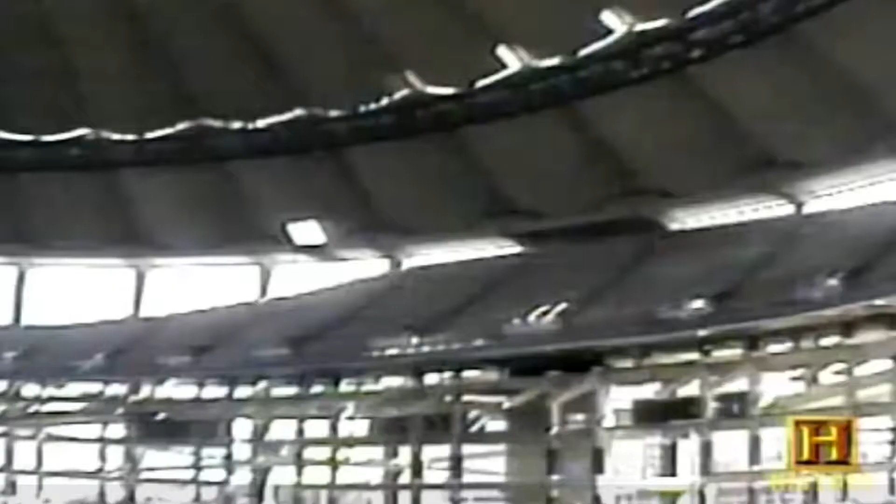The Kingdome became an exclamation point for downtown Seattle. And because of the concrete structure's durability, it was expected to stand the test of time. 8, 7, 6, 5, 4, 3, 2, 1.

But it was not to be. It took just seconds for dynamite to demolish what had taken years to design and build. On a Sunday morning in March 2000, the Kingdome's concrete was blown to bits in a rapid-fire series of detonations. 53,000 cubic yards of concrete imploded in the blink of an eye.

When you watch the Kingdome in Seattle as it's imploding, being demolished in a big explosion, you have to say, why? Why has it only been 30 years that we've used this building? Well, it happens that the needs outgrew the structure.

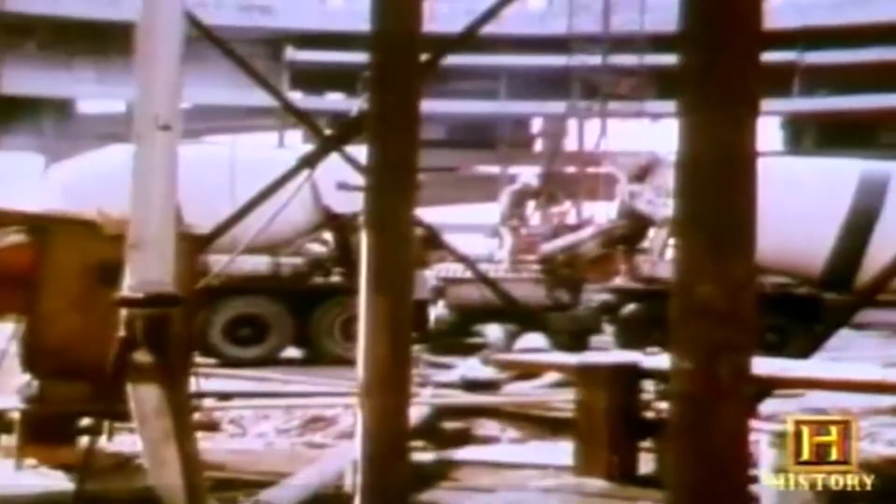Over the years, the Kingdome's concrete had undergone some extensive renovations, but its strength and durability were never questioned. When Seattle's football team was sold in the late 1990s, its new owner was guaranteed a new stadium. That sealed the Kingdome's fate.

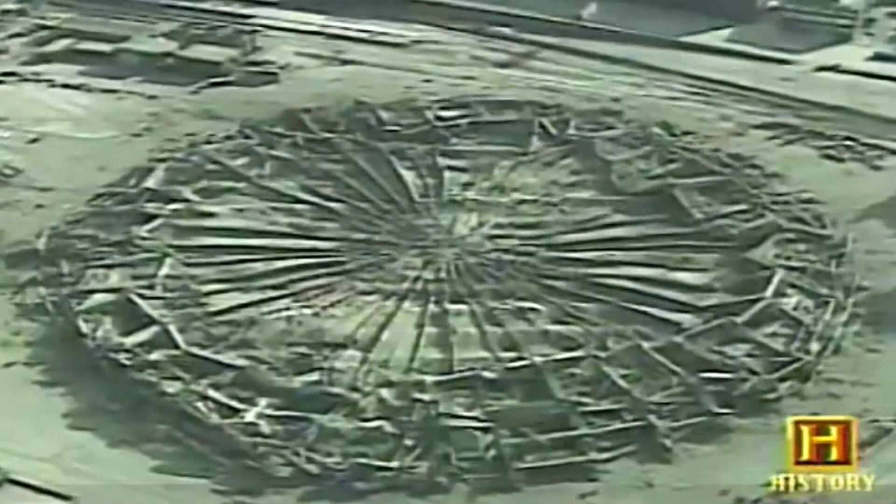It doesn't mean that the concrete materials have gone bad. It's no different than many of the other buildings that have been taken down in order to make way for new structures as we have new needs in the community. This has been happening throughout the ages. And throughout the ages, it is the development and use of concrete that has made it all possible.

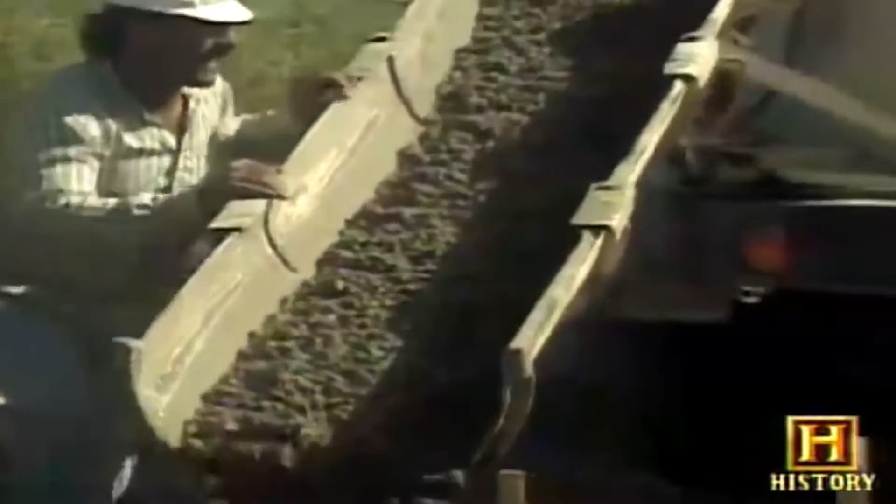Well, concrete is a composite material. It's an artificial stone, and it is made of sand, stone, water, and cement. Each of its ingredients is essential, but it is the chemical composition of cement that makes concrete possible. There's a saying in the concrete industry that cement is to concrete as flour is to cake. If concrete begins with cement, then cement begins at the rock quarry.

Huge rocks and boulders are crushed into a rough gravel. At a cement plant, they're ground into a fine powder, which is mostly limestone. It's then mixed with small amounts of calcium, silicon, aluminum, and iron. This material, known as raw meal, is now ready for the kiln, a huge cylindrical furnace.

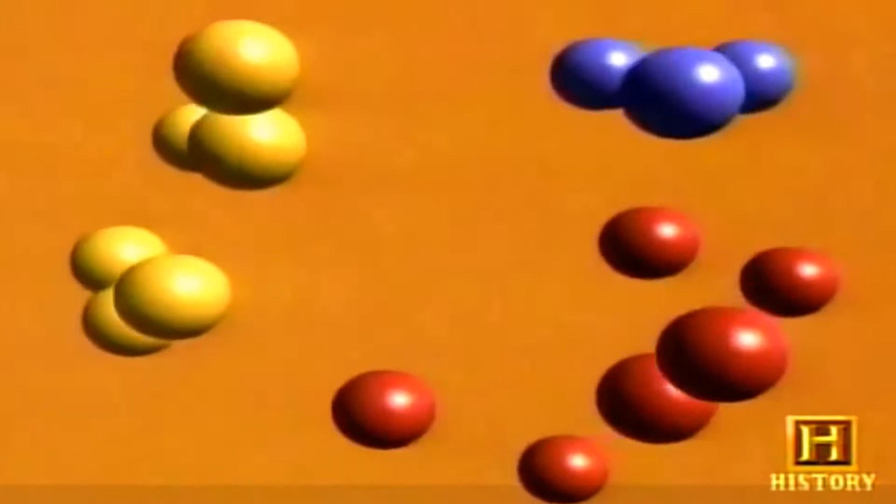A modern kiln is 100 yards long, the length of a football field. It's the world's largest moving piece of equipment, and one of the hottest. The raw meal enters the kiln's upper end. As it turns, the material moves through progressively hotter zones. As it tumbles down the rotating kiln, it is heated to a temperature of 2,700 degrees Fahrenheit and becomes partially molten. Under this intense heat, individual molecules break apart and recombine to form a new marble-sized component called clinker.

Once it is cooled, the clinker is mixed with a small amount of gypsum, then ground into the superfine powder known as Portland cement. It got its name because it resembled stone from the island of Portland, England. Portland cement is the thing that binds everything together. To create concrete, the cement is blended together with water, forming a paste that coats the surface of the final ingredients: sand and hard, coarse stones known as aggregate.

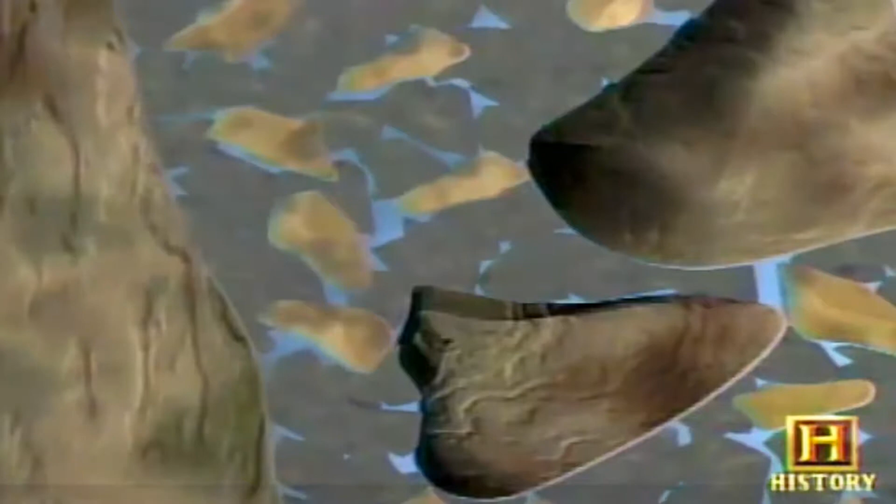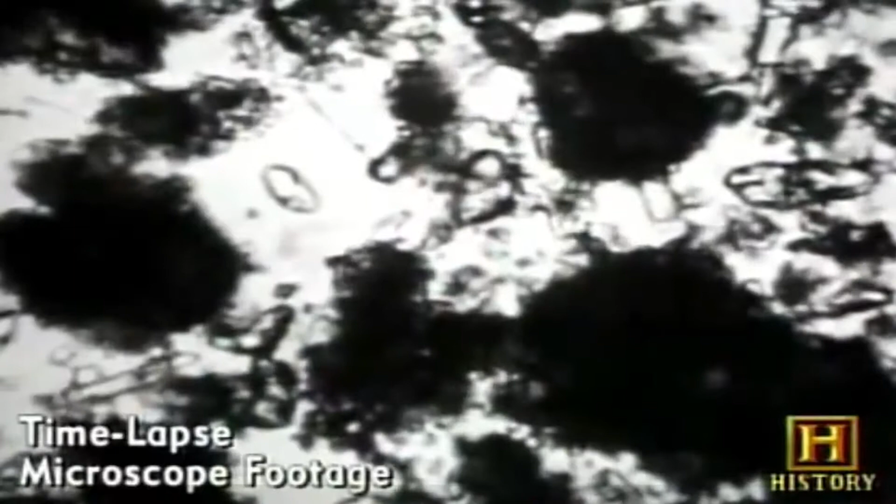When water and cement mix, it begins a process called hydration, which is a chemical process, changing its properties. It goes from a very plastic liquid state to a hardened state. And that process is what combines all of the sand and the gravel and the cement together into this hard mass.

Concrete has evolved into a critical component of modern civilization. You see concrete every day. You walk on concrete sidewalks, you drive down concrete roads, you go to work in a concrete building. Some people go home to live in a concrete house. Concrete is the building block of civilization.

Concrete is as ancient as it is modern. The history of cementing materials together goes back to the time when prehistoric man abandoned his caves to build shelters. He used mud and clay to fill in the gaps between stones, to keep out the wind and the cold. Later, the Assyrians and Babylonians used clay mixed with straw. The straw gave the earthen material packed around it a rough skeletal framework and allowed it to be shaped.

The Egyptians used lime and gypsum, a mineral rich in calcium sulfate, to create a material that would harden even better. The Egyptians may have been using lime and crushed stone to cast certain shapes, small shapes, and use them on their buildings and monuments, but they had not discovered concrete as we know it today, which is a much stronger material.

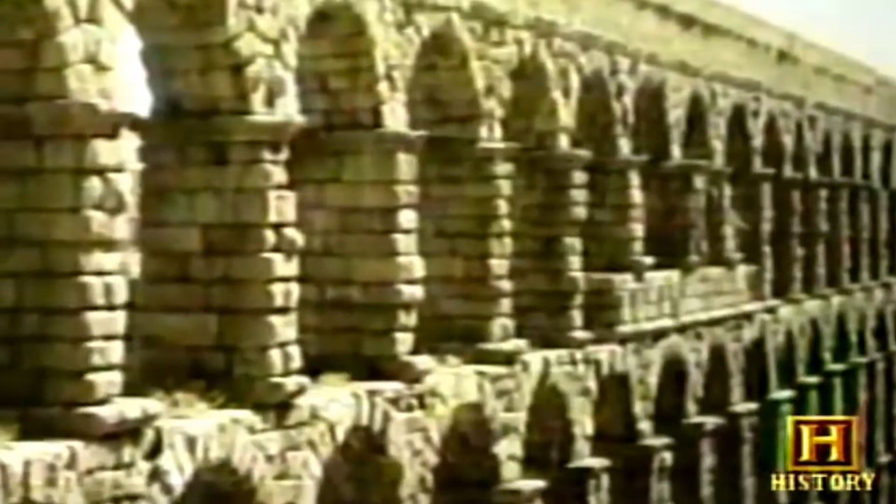The Greeks made further improvements. Then the Romans perfected a cement that produced structures of remarkable durability. We have to go back to the Roman Empire and the ingenuity of the Romans. And the aqueducts, to me, are probably the best and the greatest thing they did. It was only in the ash of the volcanoes that developed the Roman concrete.

That volcanic ash would come to be known as pozzolan. It is a very fine dust, which is good for the concrete because you got a lot of surface area to it. And so when they took the pozzolan and mixed it up like they would put it on the wall, holy moly, all of a sudden they get a real material that'll set hard underwater.

How did they accomplish this? This was a huge open space with a single domed closing on the top. And yet, that was 2,000 years ago. Well, the Roman engineering really developed quite a bit in the highway, in the water transportation, and in the materials area. They learned very specifically how to handle concrete.

While the best examples of Roman architecture still exist today, whatever knowledge their architects had disappeared when their empire faded into the pages of history. The quality control features of making concrete was forgotten. It's as simple as that. They lost the recipe on how to control the quality of their product.

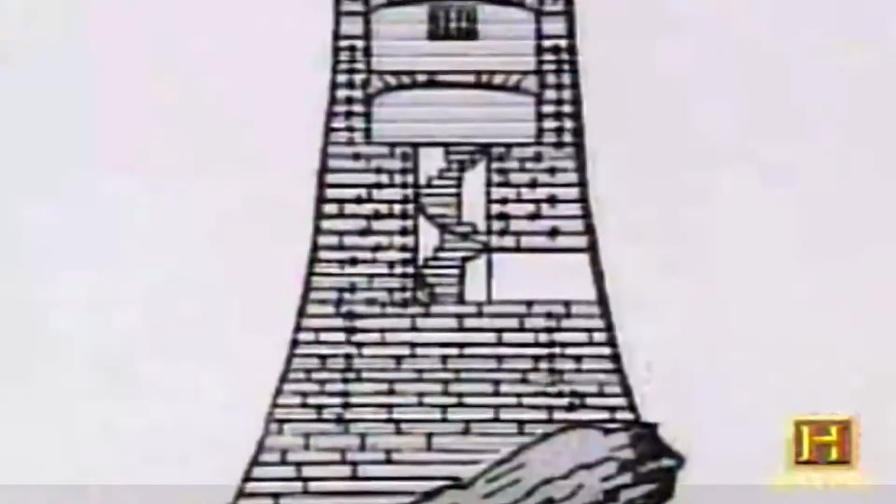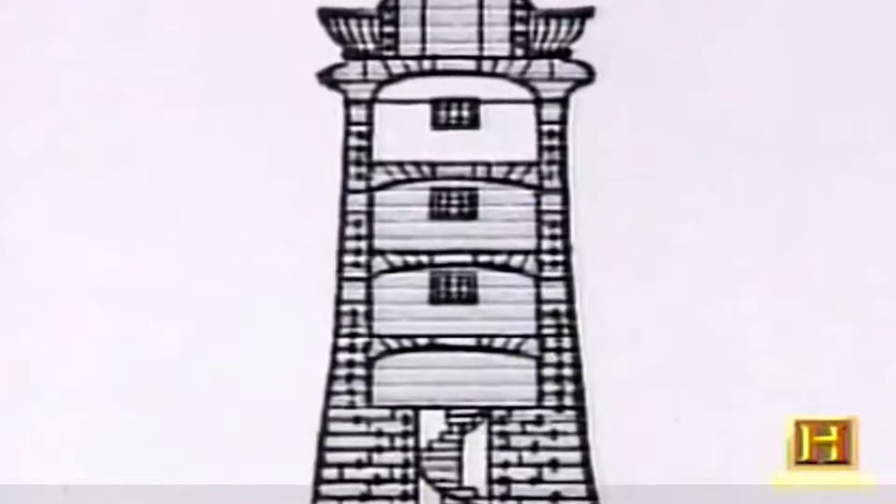He used some of the real clay limestone sources that he cooked or burnt to make a material. It was called hydraulic lime. And he used this for his blocks mortar he needed in the lighthouse. It wasn't a very outstanding material, but it worked underwater. I think it was a definitive moment.

Mortar is the plaster that holds stones together. In order to create a material that binds properly, many scientists experimented with grinding limestone and clay together. But it wasn't until 1824 when another Englishman, Joseph Aspdin, made a major discovery. He burned his mixture of limestone and clay into lumps and then crushed the lumps into a fine powder.

When he mixed it with water and sand, it made a strong mortar that would harden underwater. Aspdin obtained a patent for his product in 1824. He called it Portland cement. His claim to fame is that he patented the process that these other people had been doing for the last 50 years.

Portland cement would come to define the concrete industry. But the next 50 years would lead to a series of new developments that would change the use of concrete and the world forever. At the beginning of the 19th century, the United States was still in its relative infancy as an independent nation. But with its ties to England broken, America had begun a period of rapid expansion that had to rely on its own natural resources: coal, minerals, timber, and water.

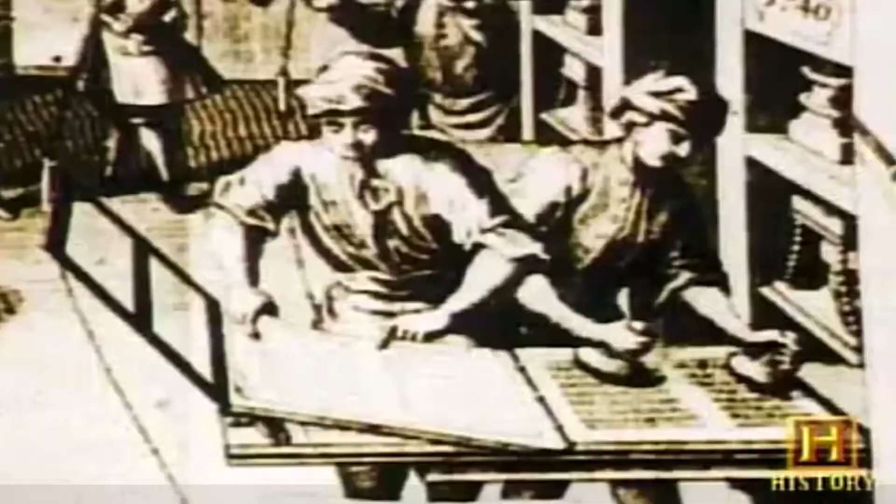In the past 200 years, there's been a very rapid growth, starting in the 1840s, with steel, with glass, with aluminum, with ceramics, with rubbers, and concrete. I think, in fact, that our world civilization reached a point that we needed these materials.

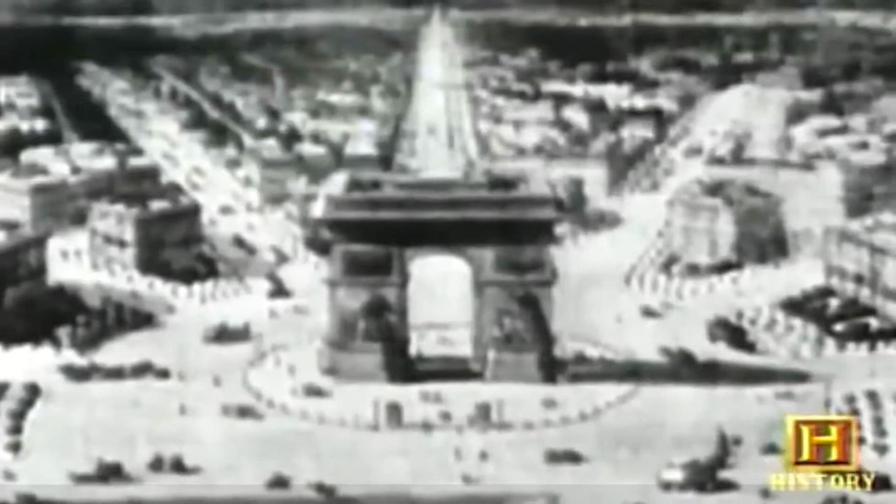By the 1850s, Portland cement had become widely used in Europe, and it was there that a major breakthrough was made that would forever change concrete construction: the first use of iron to strengthen concrete by reinforcing it internally. Reinforced concrete is concrete in combination with some other reinforcing material, usually steel, that when used with concrete actually works to resist both compression and tension in the concrete.

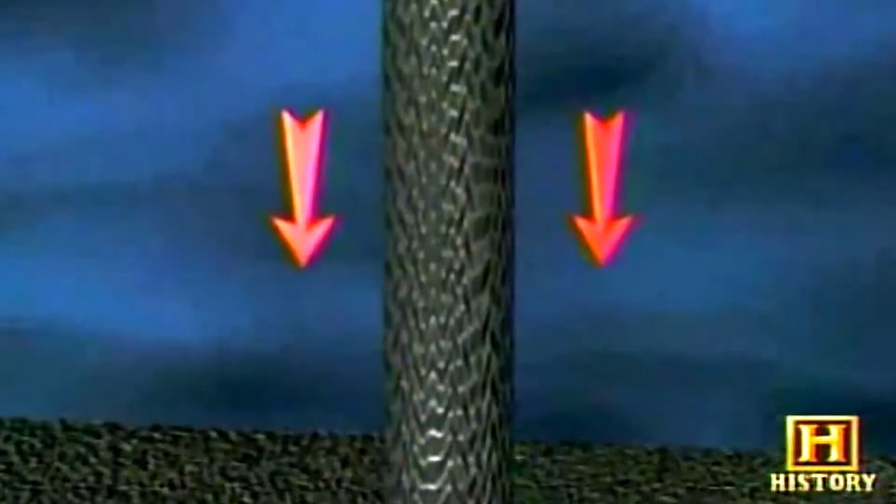Tension is a pulling force that acts in one direction. An example is the force of a cable that is holding a weight. Under tension, a material usually stretches and returns to its original form if the force doesn't exceed the material's limit.

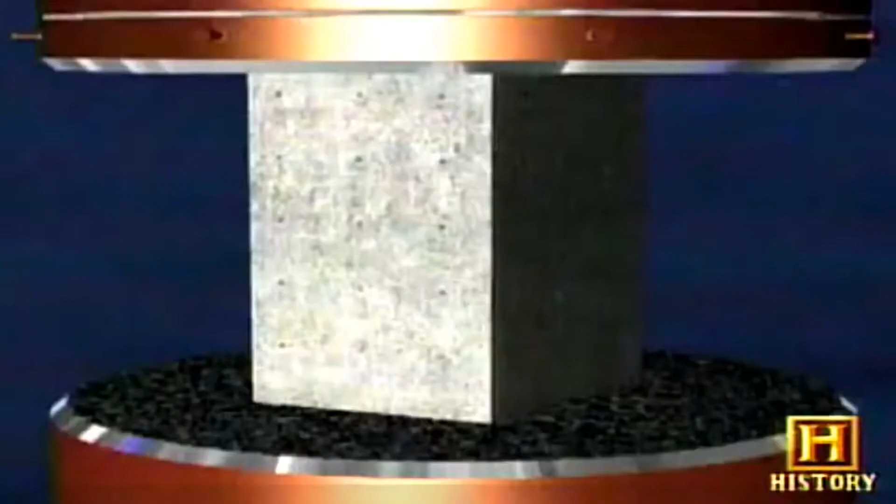Greater forces create greater tension, which can rupture the material. Compression is the decrease in a material's volume that results from the application of pressure. That pressure can come from one or several sources.

Tensile strength is the ability for a material to resist pulling or tension. Pulling is simply pulling material so that you're trying to pull it apart, as opposed to compression, where you're trying to push it together. Concrete, historically, and just by nature, is stronger in compression than it is in tension.

The invention of reinforced concrete is usually attributed to a Frenchman, Joseph Monier, who made garden pots and tubs with concrete reinforced by iron mesh. Monier patented his discovery in 1867. Pretty soon, others in the building trade saw it and began to think of how they could use the material elsewhere. If you could make a pot that strong and that thin and that light, imagine what we could do in the walls of a house or the roof of a cathedral.

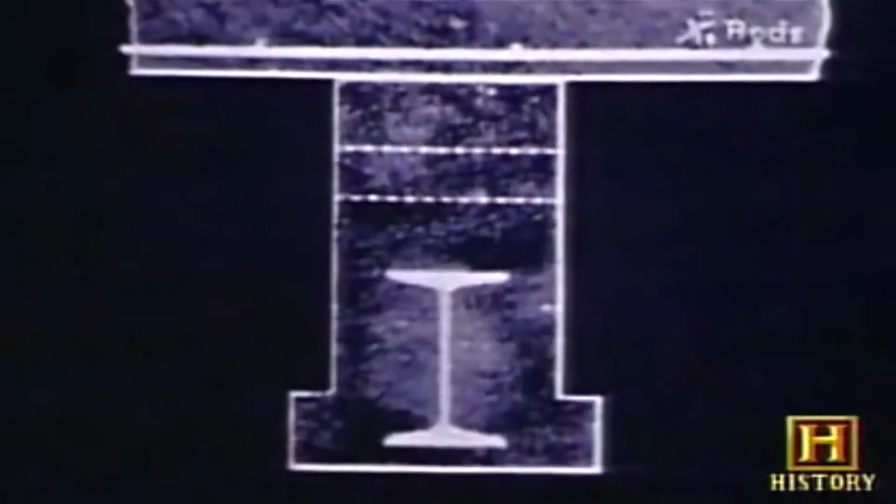The first reinforced concrete structure in the United States was a mansion in New York that made extensive use of concrete beams reinforced by iron joists. When designers began to understand how to design reinforced concrete members, the use of concrete for structures actually expanded significantly.

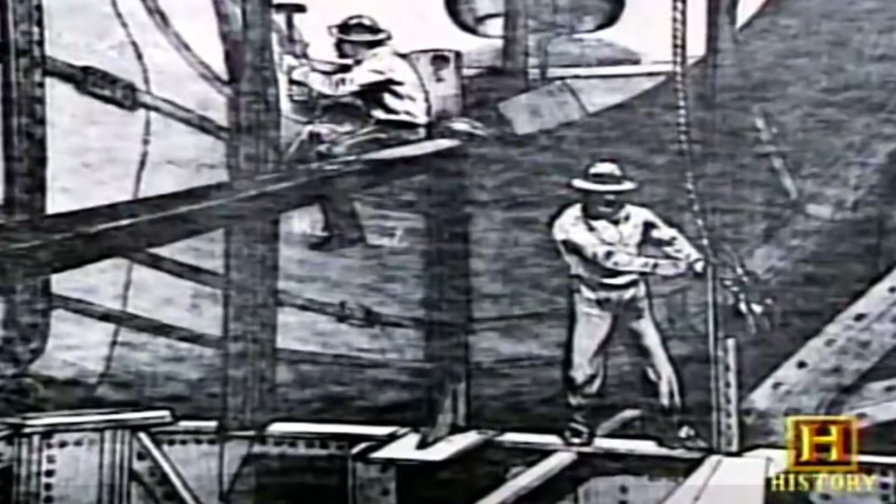Industrial expansion called for a stronger and more uniform material than natural cement. By the 1870s, American engineers had begun to specify the use of European Portland cement for their projects. A Pennsylvania man was convinced he could produce Portland cement in the United States that was just as good as the German and English cement being imported. In 1874, David Saylor founded the Coplay Cement Company in the Lehigh Valley area of Pennsylvania. It would come to be known as the birthplace of the U.S. cement industry.

60-foot tall brick kilns were built to handle the increasing demand. Soon, stationary kilns would be replaced by rotary ones. This way, from the mine, you could keep dumping rocks into this kiln forever. And it would continuously create; you didn't have to cook the thing for 24 hours, empty it out, and then restart a new batch. You're essentially batching the stuff continuously.

It was around this time that Thomas Edison took an active interest in concrete. In 1902, the famous American inventor founded the Edison Portland Cement Works in New Jersey. Edison also had this great idea that he could preform a house. He could make a prefabricated house out of concrete. He thought he could make up a set of very complicated forms that were expensive at the time, and that he could cast a house and then just take all the form work off, go to the next place and make another house.

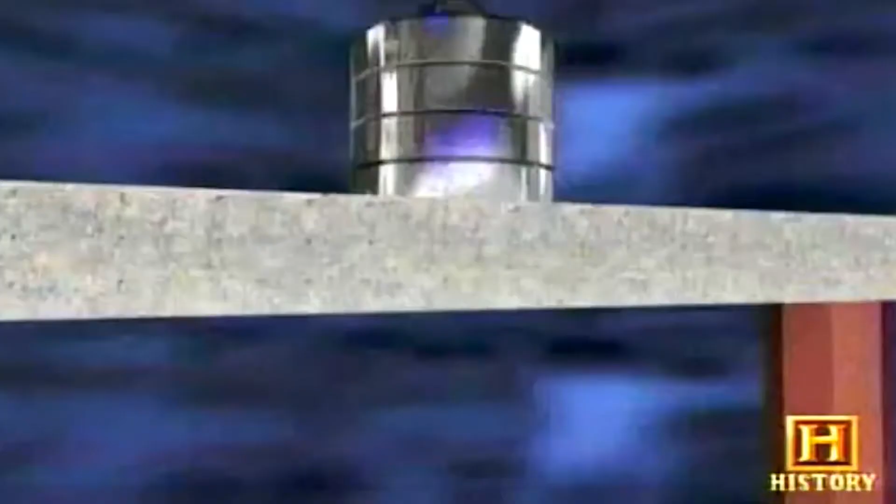In engineering, the term tensile strength refers to an object's resistance to forces that threaten to break it apart. Concrete, though strong in substance, is weak in tensile strength. So if I had a beam and I put a load on the top of the beam, if it did not have reinforcing, the beam would crack very easily and, of course, collapse. However, if we put a steel bar inside the concrete and we put load on top of it, the reinforcing bar goes into tension and can support a much greater load than an unreinforced concrete beam.

While America's skylines were changing, so were its roads. Up until now, roads were made of dirt, gravel, stone, or brick. The first concrete road in the United States was built in Bellefontaine, Ohio, by George Bartholomew in 1891. The American public definitely needed to be sold on the use of concrete as a paving material.

At first, only a small section of Bellefontaine's Main Street was paved with concrete. City officials were skeptical. They thought it would crumble and crack. They required a guarantee that the pavement would last at least 5 years. It did, and then some.

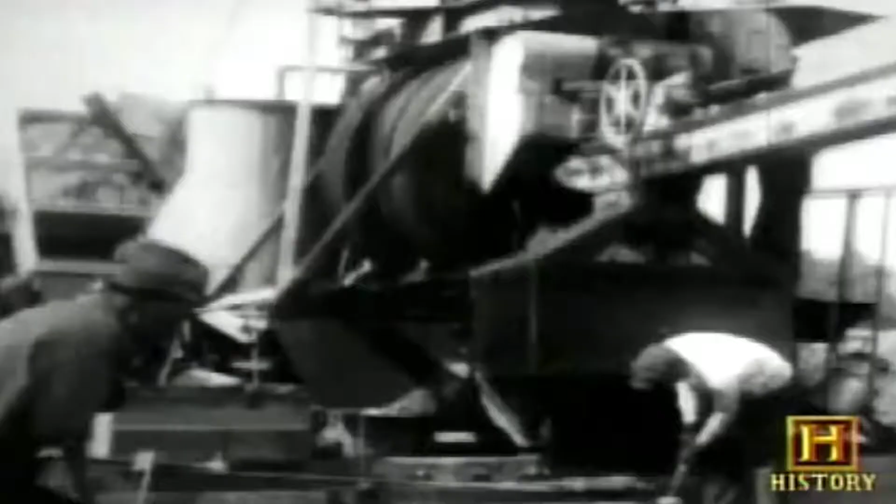There was a huge sales pitch. They paved 1-mile stretches of concrete pavement in different parts of the country in an otherwise unpaved area, and we called them seedling miles. So farmers and other people in their automobiles would drive along an unpaved road and then hit a smooth expanse of concrete pavement, realize how amazingly better the concrete pavement was, and petition their local officials and demand concrete pavement.

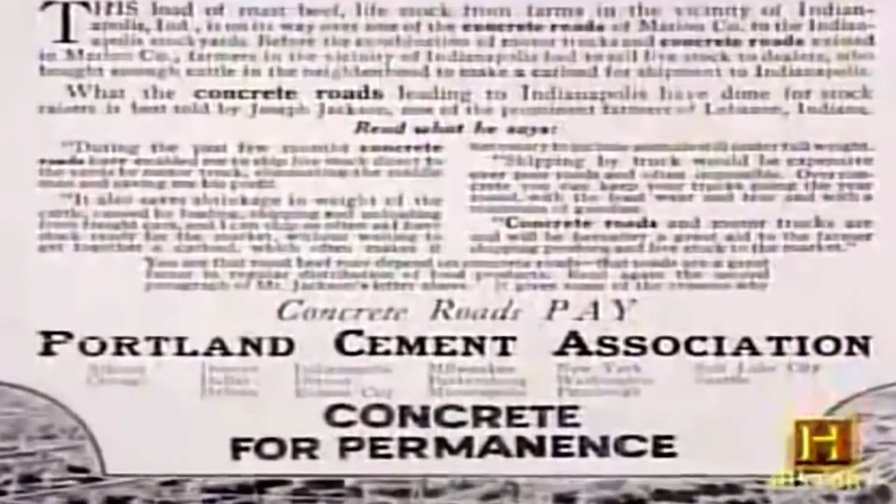The organization ran a series of ads in magazines and newspapers, selling the American public on the benefits of concrete. And one of their biggest slogans was concrete for permanence. One of the most famous ads that we ran was in the Saturday Evening Post, and it was touting the use of concrete roads that children could be off to school on any day. And they said, over the concrete road, so even that children can roller skate upon it, so strong that heavy trucks at high speed cannot break it, so enduring that years of motor traffic cause no appreciable wear, unaffected by moisture, heat, cold, or frost, and maintained at very low annual expense.

Soon, engineers were learning how to better produce this new building tool. In the 1900s in the United States, concrete was made at the site. It was mixed in a small mixer right at the site, and the workmen put in all the components, and many times you got poor qualities of concrete at that time because there wasn't a lot of control. That was about to change.

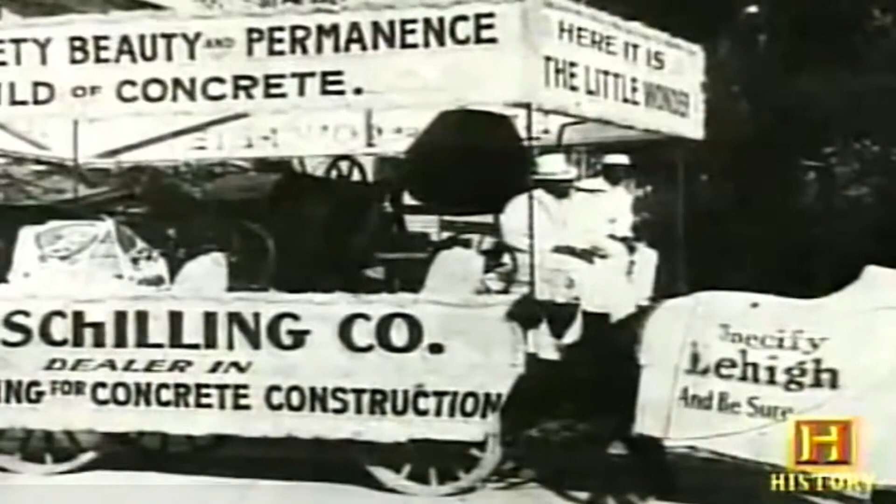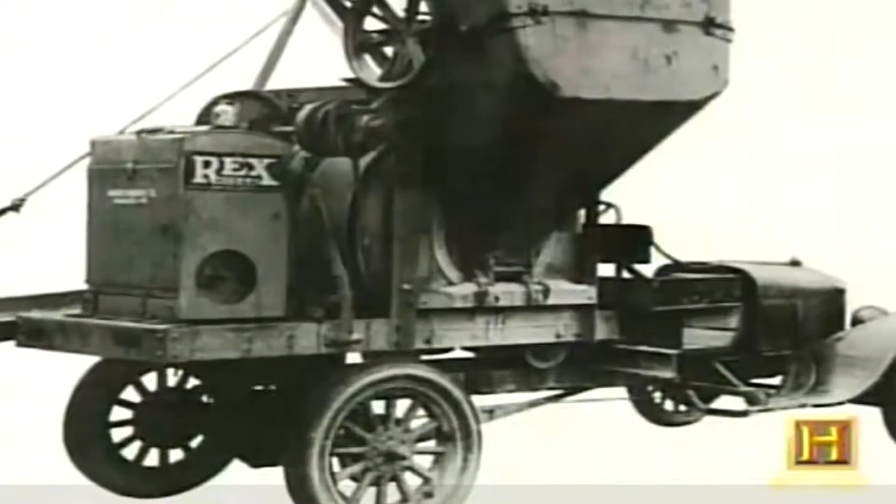It started out in the early 1900s with horse-drawn trucks, mixer trucks. As the horse or mule pulled the mixer, wood paddles would stir the mixture while water from a small tank was added. Because of its size and weight, these mixers were limited in the amount of concrete they could handle. By 1916, steam-powered rotary drum mixers were being used. And in the early 1920s, gasoline-powered paving mixers were being mounted on trucks and driven to job sites.

One of the most important events in the use of concrete is the development of trucks that actually deliver concrete to the site, whereas in the past you really had to mix the materials on site to use it. As fast as Henry Ford was building cars, engineers were building roads and highways that connected cities and towns. Both concrete and asphalt were used. Concrete roads cost more but lasted longer, and asphalt roads cost less, didn't last as long. So it was a question of economics.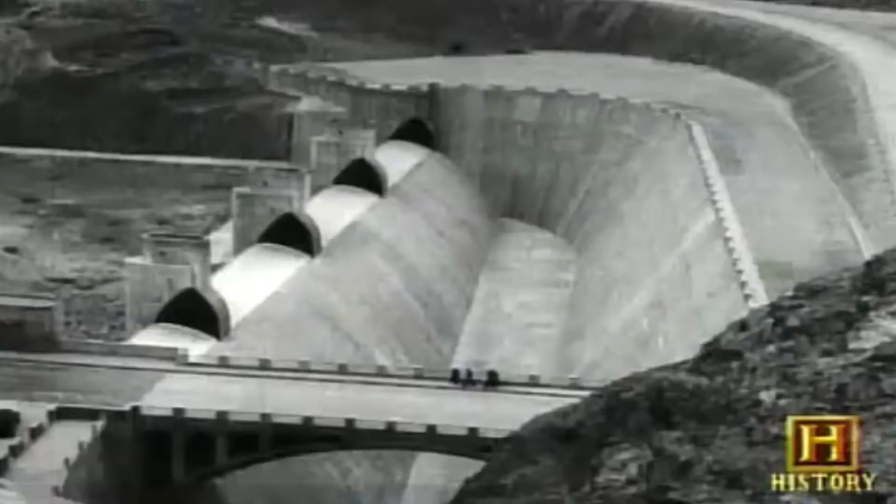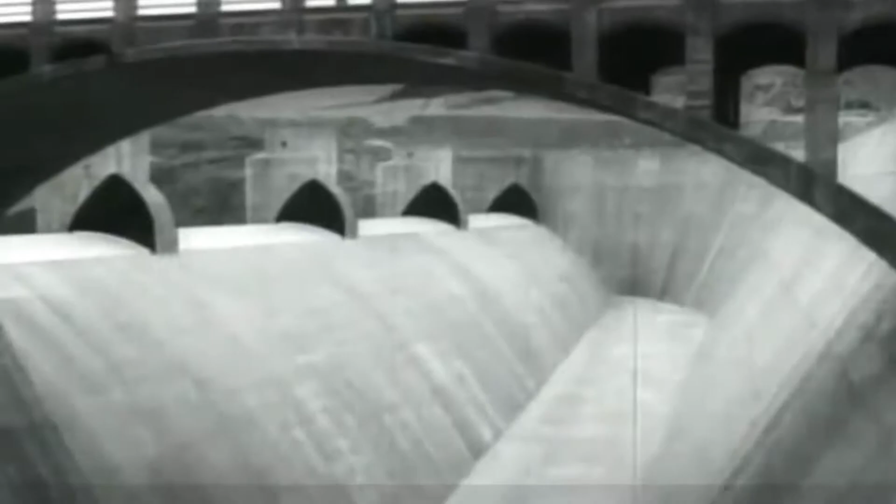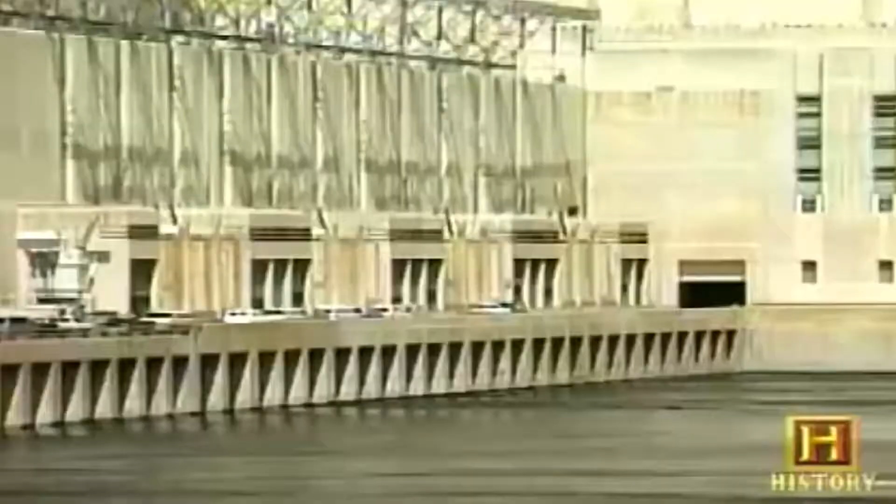While road builders were busy connecting the country, engineers were setting their sights on projects of a much larger scale. Dams. Ever since the beginning of civilization, man has attempted to control water. But to do that, you must control nature itself. Engineers around the world have accomplished that feat with concrete dams. It will take hundreds of millions of tons of concrete and 16 years to build the Three Gorges Dam in China. The gargantuan structure designed to eliminate flooding along the Yangtze River is China's biggest construction project since the Great Wall. Three Gorges will stretch 1.5 miles long, much wider but not nearly as tall as the granddaddy of dams in the United States, Hoover Dam.

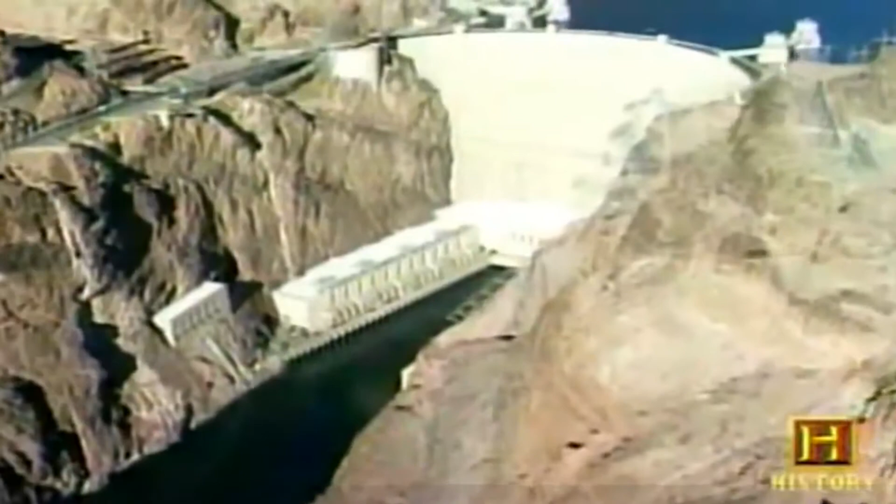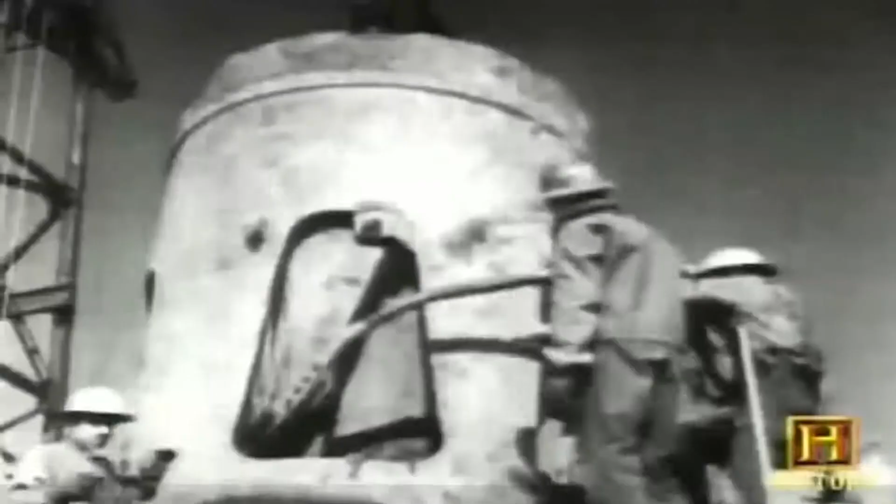I think Hoover Dam does become the benchmark for anybody talking about dams in the U.S. It took more than 3 million cubic yards of concrete to create Hoover Dam. Built on the Colorado River near Las Vegas, Nevada, Hoover Dam weighs 6.5 million tons. It stands as tall as a 70-story building. It was poured in thousands of separate pieces, then linked together, literally forming a concrete curtain. Construction crews not only had to deal with soaring desert temperatures, they had to contend with the massive amounts of heat generated from the concrete as it cured.

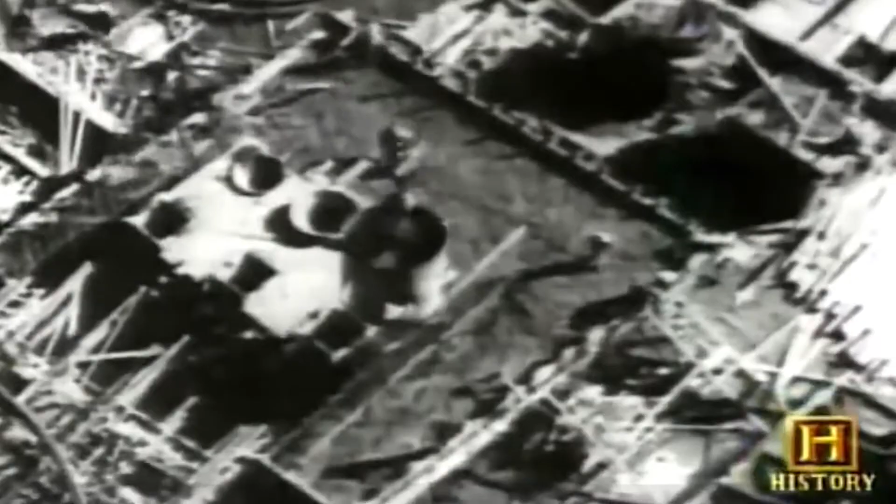All concrete, as soon as the cement, the binder, mixes with water, gives off heat. In a dam construction, however, it becomes a very serious concern because of the temperature buildup within the structure. On Hoover Dam, miles and miles of pipes were built into the dam and carried cold water through the dam while the concrete was curing. If the dam had not had those pipes for cooling, it would have taken 125 years for the temperature of the concrete to reach ambient conditions. Vibrators were inserted into the freshly poured concrete, literally jiggling it and removing air pockets.

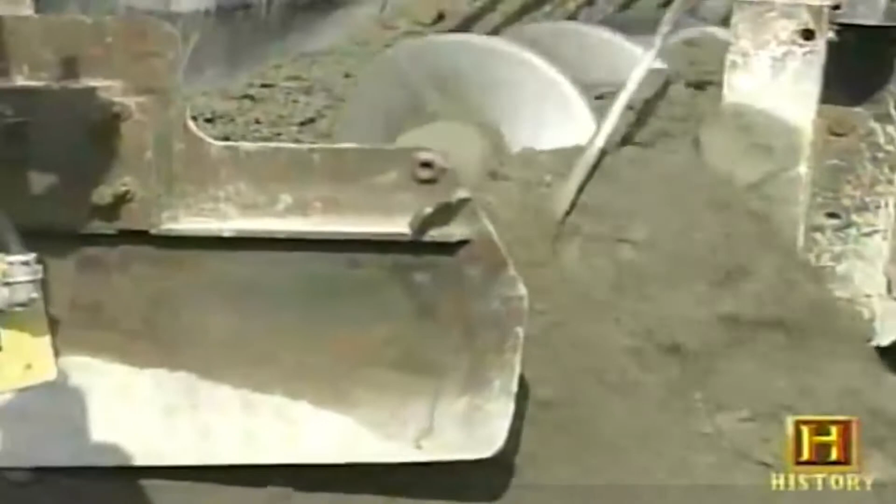Modern dam designers still vibrate freshly poured concrete, but more and more are turning to a newer and drier form of concrete. Roller compacted concrete is a very stiff mix of aggregates and sand and cement. It's only under the high pressure, the heavy load of the roller, that actually compacts it into something tight enough for you to actually use.

We dump it out of a dump truck and we run over it with a steamroller, essentially. And we keep doing that in layers until we're 200 feet up in the air. Basically, as fast as you can make concrete is how fast you can make a dam.

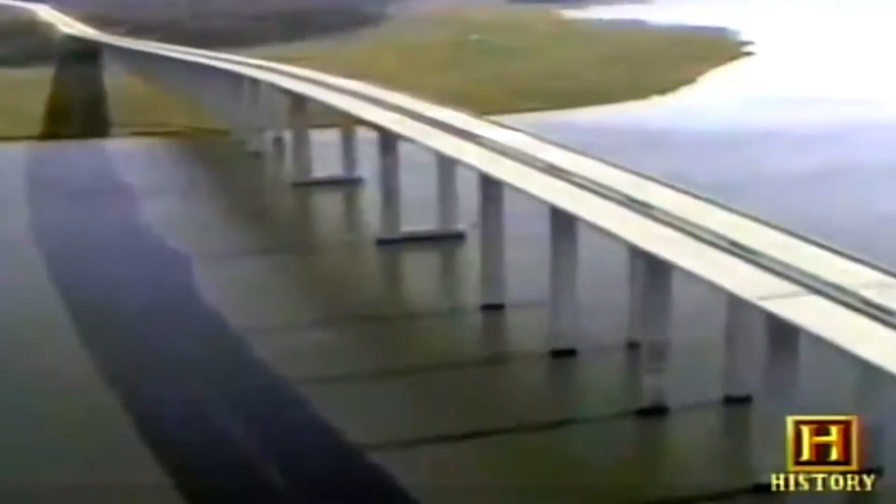If concrete dams are designed to hold back water, concrete bridges are built to traverse over it. The challenges are the same for any bridge designer from the beginning of time. The loads it has to carry. The first concrete bridge reinforced with steel in the United States was built in Rock Rapids, Iowa, about 1894.

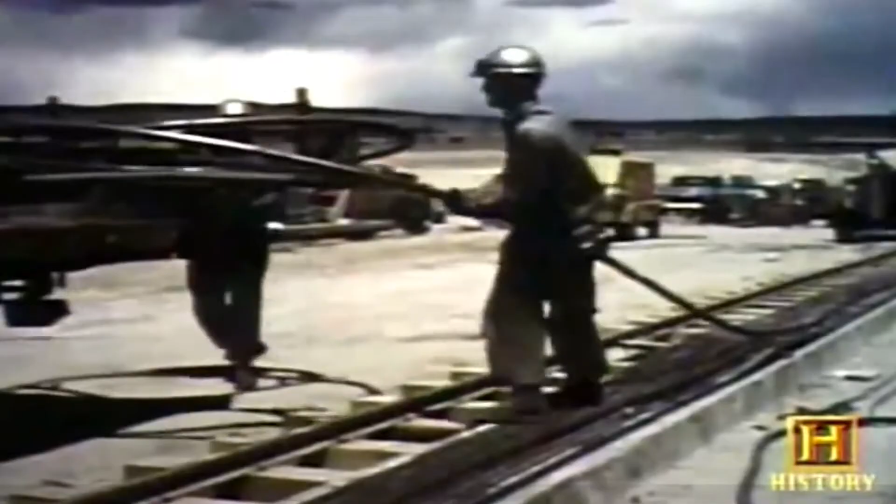As concrete bridge making evolved, it embraced the principles of pre-stressing, using concrete structural members along with reinforced steel strands to increase its inherent lack of tensile strength. The cables are stretched tight, like a rubber band, inside sections of concrete as it is being poured. The hardened concrete now includes the extra strength of steel.

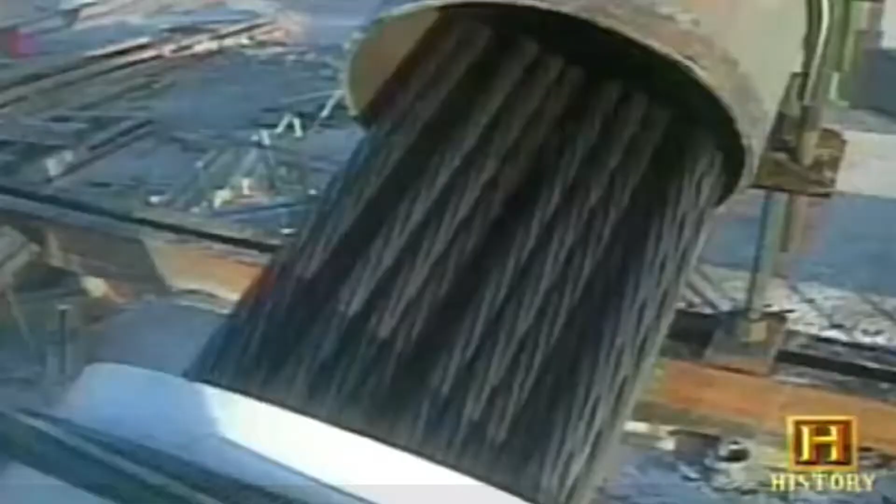Pre-stressing is something that complements concrete. Concrete is a compressible material. It'll hold tremendous loads compressing it. But if you try to bend it, it'll crack. So what we do, we add pre-stressed strands, and these strands, if you can envision a block of concrete, you have a pre-stressed strand that goes all the way through the block.

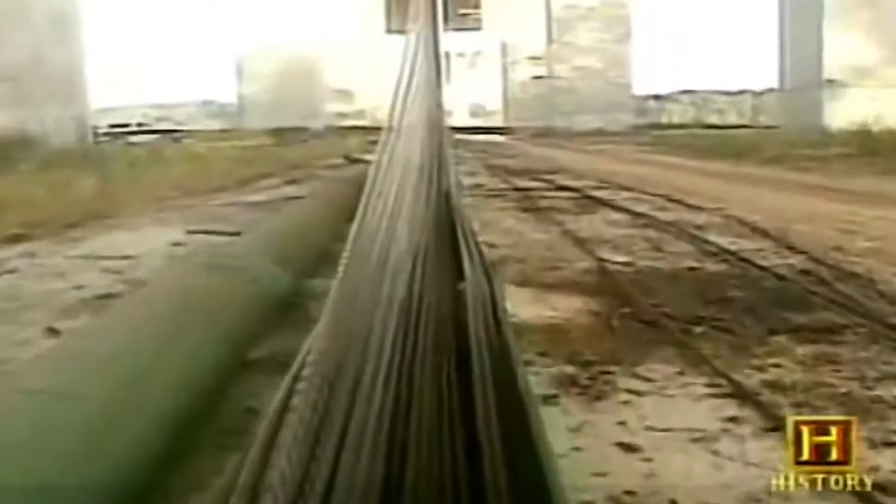You pull on that strand and it pushes the concrete together, and it takes the tension at the bottom of a span for the concrete, and then the top of the span becomes in compression. So now you have an element of concrete and steel that is extremely durable. The first major bridge to use this technique was the Walnut Lane Memorial Bridge, built in 1950 in Philadelphia, Pennsylvania.

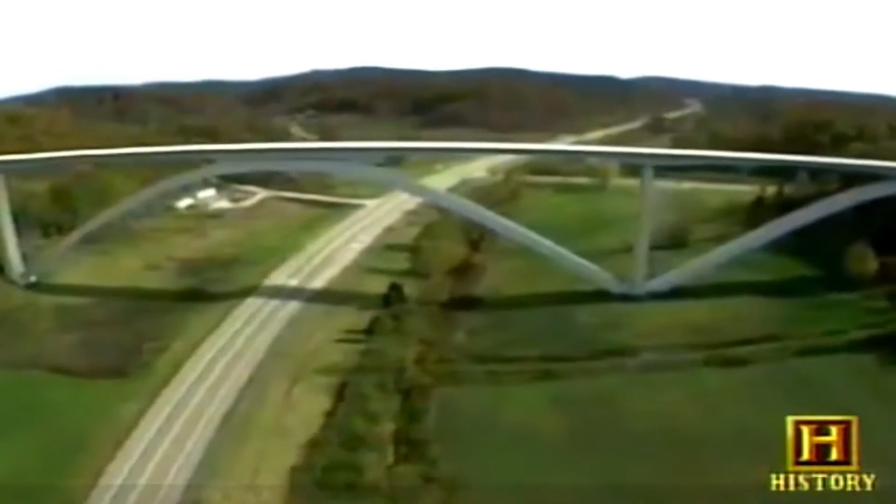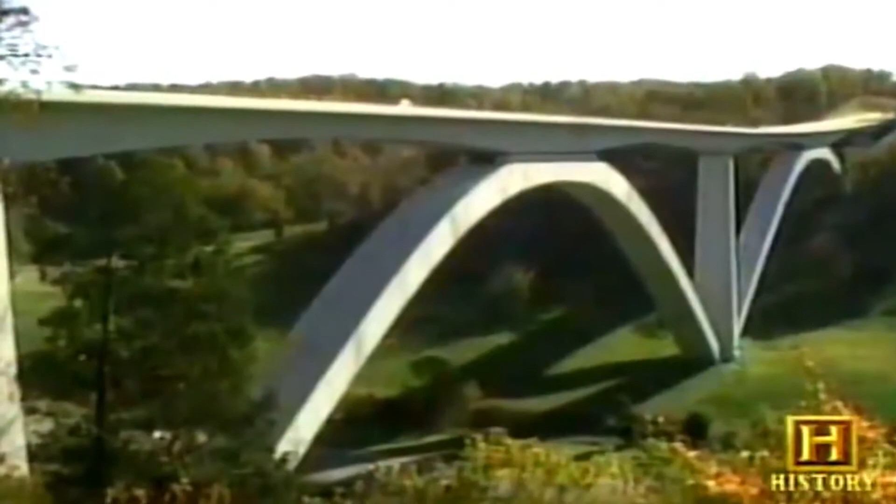Gene Figg continues the tradition of American concrete bridge making from his Florida office. Figg Engineering has designed some of the world's most sophisticated concrete bridges. We feel that America deserves better and beautiful bridges. Figg's company designed the Natchez Trace Parkway Arch Bridge. It was built in 1994 near Nashville, Tennessee. It's America's first and longest precast segmental concrete arch bridge. In theory, building a segmental bridge is like stringing beads together on a necklace.

The Natchez Trace Arches was a chance to cross a valley, and at the same time, it was a chance to really utilize different shapes of concrete. And it all comes together with seamless appearance because it all matches, which is one of the key things in a bridge. If you can get a seamless connection, then the bridge, you don't know why it looks good, but it really looks good.

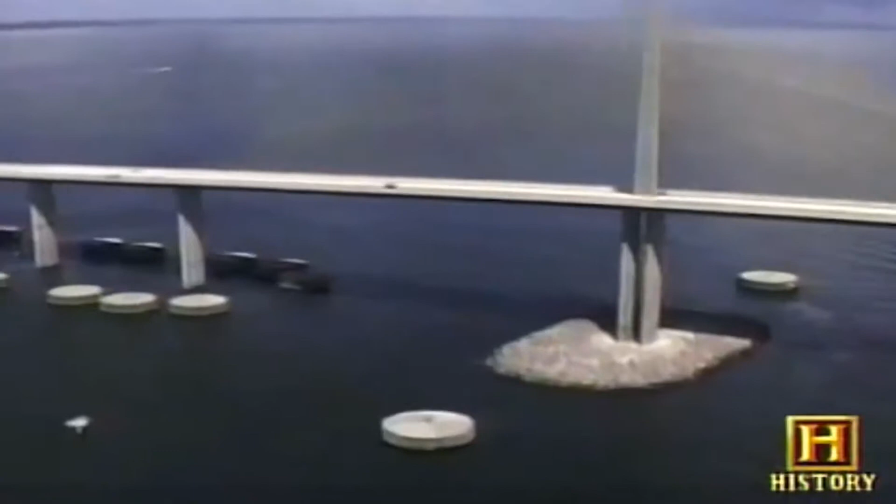The Sunshine Skyway Bridge in Tampa, St. Petersburg, Florida, is among the company's many other signature concrete bridges. This is what is known as a cable-stayed bridge. It's created a thin silhouette of concrete that seems to float in midair. If we're going over water, we try to have the bridge have some shape to it that's not just a straight bridge. It has some movement to it. The Sunshine Skyway Bridge is distinctive because it has an element of a sailboat going across the whole bay.

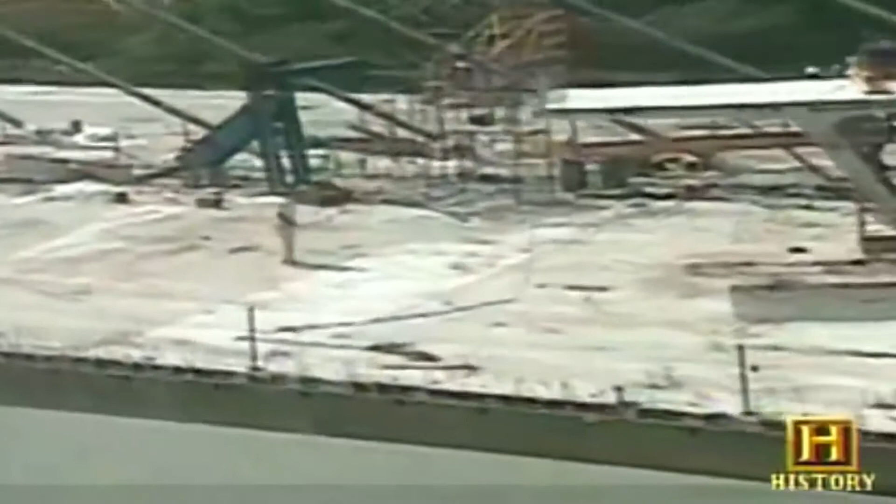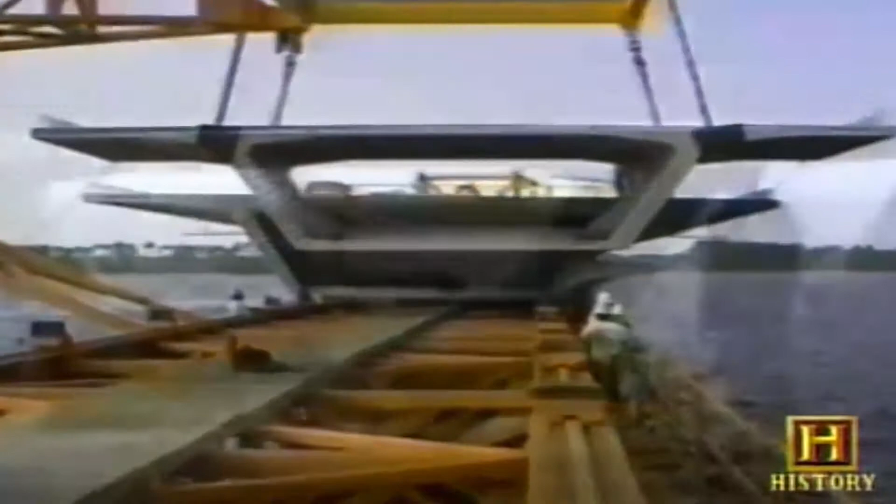But when you build a concrete structure like this, you expose it to the elements, wind, rain, and salt water of any kind. The environmental enemy of concrete would be salts. The cracks are the problem. Cracks in the concrete cause the seepage of this salt material to go down and corrode the steel. With the performance you can get today from the concrete and the pre-stressing, you'll end up with a bridge that's really just so durable that the life is more than 100 years.

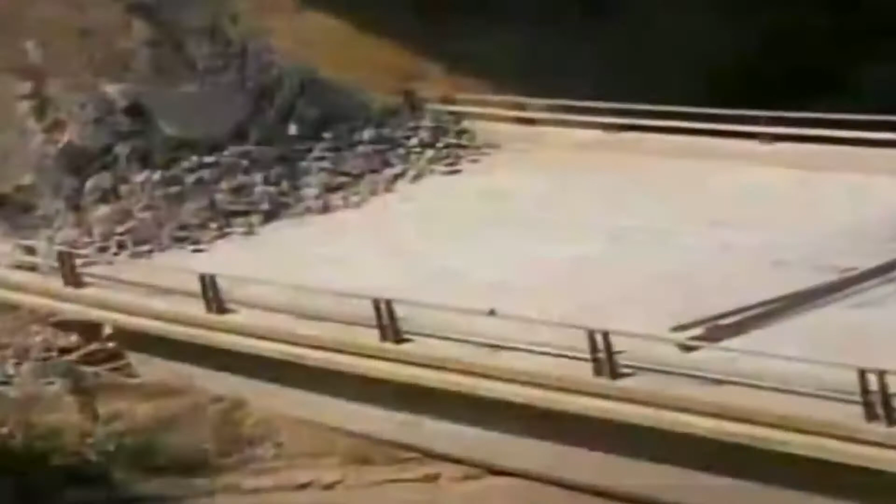Next, concrete may be strong, but nothing is immune from the mighty power of Mother Nature. Concrete has become an indispensable building material of modern times. It is formed into giant slabs for airport runways, molded into miles of superhighways, shaped into precast sections of bridges, and poured into the foundations of eye-catching skyscrapers of enormous weight and girth.

The process of taking a fluid material, pouring it into a form, and having it set up to something that can support a 100-story building is amazing and is one of the prime properties of concrete. Concrete's an exciting material. You know, people think of concrete as the gray stuff, the sidewalks we skin our knees on, that material we sneak our handprints into.

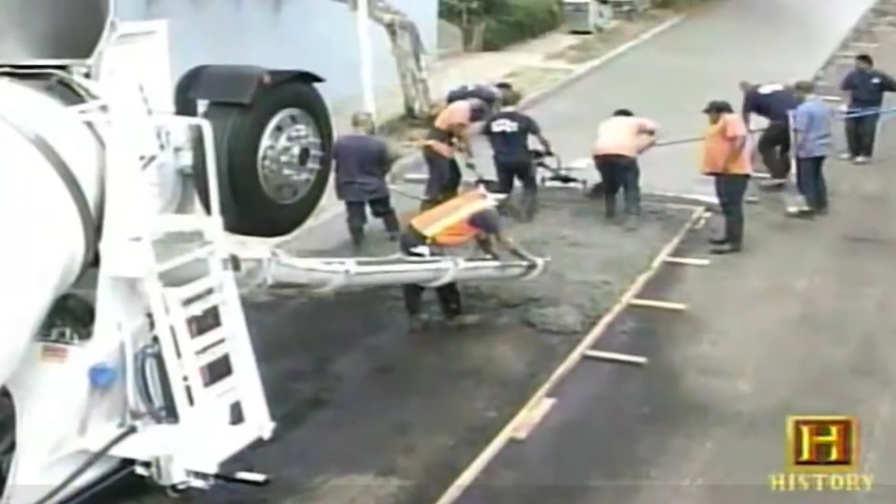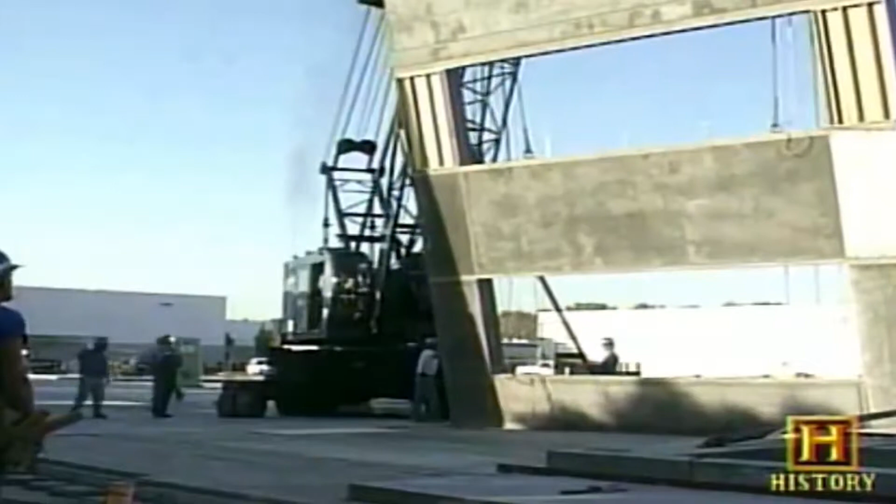But concrete's pluses are also its minuses. By its very nature, concrete is an extremely heavy material and not flexible. All concrete cracks, it's the nature of concrete to crack. Concrete buildings, of course, are subjected to a lot of different environmental conditions. Some of these environmental conditions are forces, such as earthquake forces or wind forces, tornadoes and hurricanes.

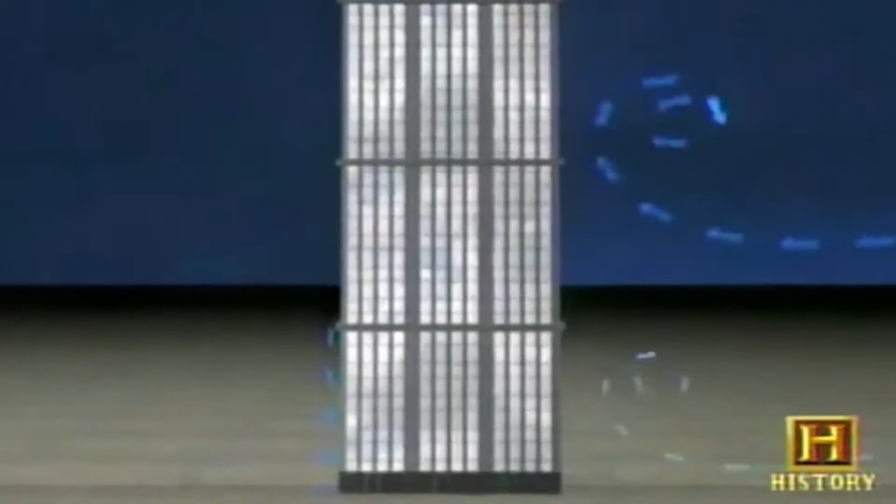The taller the building, the greater the wind forces that push it back and forth. But the greatest and most unpredictable threat to a concrete structure comes from the ground up. San Francisco, California was practically destroyed by a powerful earthquake in 1906.

The entire Bay Area sustained major damage from another tremor, the Loma Prieta quake in 1989. In Southern California, the 1994 Northridge earthquake destroyed freeway overpasses and collapsed buildings. Even the mighty strength of reinforced concrete must yield when the Earth's tectonic plates collide.

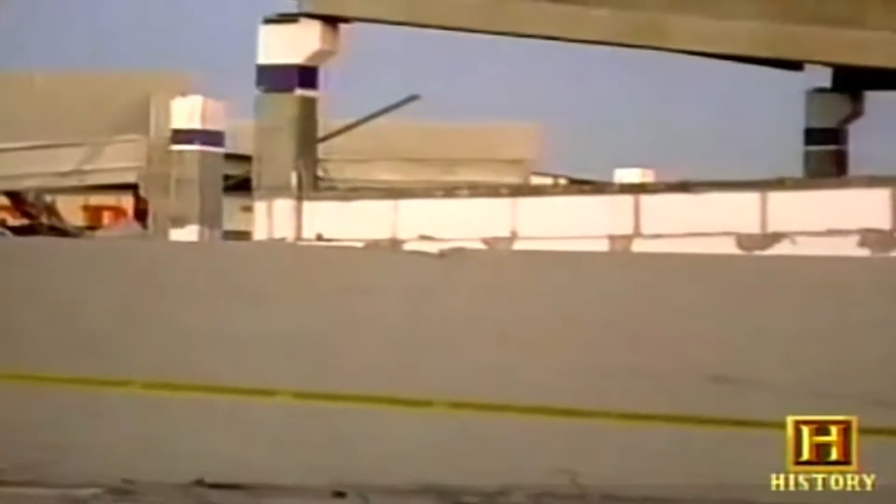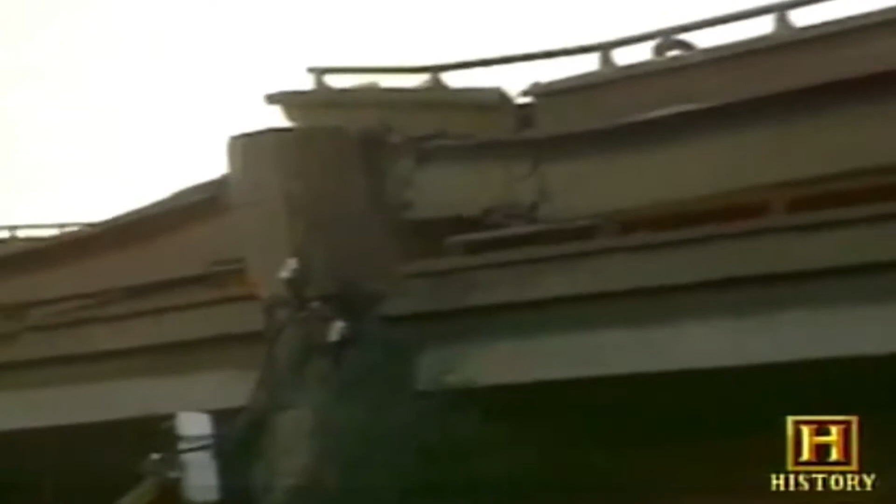Earthquakes are a real nasty thing. Here's the building sitting in the air, and here's the building, here's the ground. Well, the building doesn't know that it's supposed to move with the ground, so it's sitting, and there's a shear condition that moves across the picture and it cracks everything, cracks all the concrete and bends the steel and cracks the steel. So what you have to do is design these structures to take an estimated shear so that it won't bend. It moves, but it doesn't bend.

Scientists have been studying the effects of earthquakes for many years. Quakes are often simulated in laboratory stress tests. One thing about earthquakes is that we still don't have a great understanding of how they work. And so certainly after every earthquake, we gain some knowledge that we can then incorporate into our new building codes and our new design techniques.

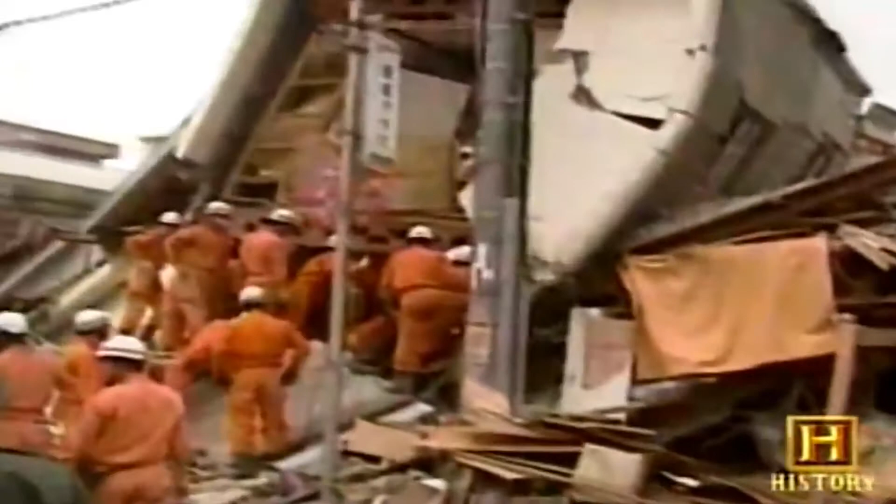Kobe, Japan, 1995. The city is decimated by a powerful earthquake. Hundreds of thousands of buildings are destroyed. It was a brutal lesson. We're learning. A lot of things that had problems, either in California or in Japan, were buildings or bridges that were designed before we knew these things that we know today.

Another natural enemy of concrete is wind, especially the violent forces of hurricanes and tornadoes. This is Hurricane Carla in all its strength. After several days of waiting in the Gulf of Mexico, late today it moved inland.

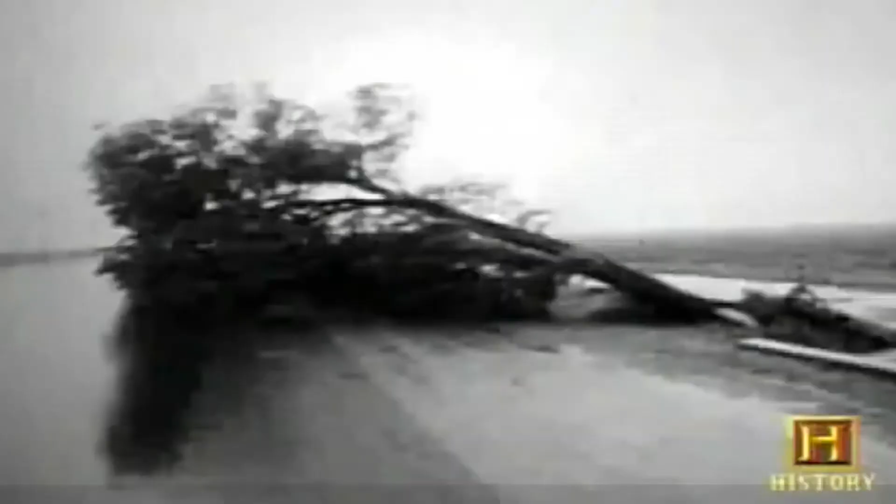Hurricane Carla ripped through the Texas Gulf Coast in 1961. Its two-day-long rampage left a wide path of destruction in its wake. Winds of more than 100 miles an hour sent deadly projectiles flying through the air like missiles. Concrete structures were better able to withstand the storm than other traditional wood-framed buildings. 3, 2, 1. Lab tests have shown that walls made of concrete can withstand wind forces greater than any hurricane.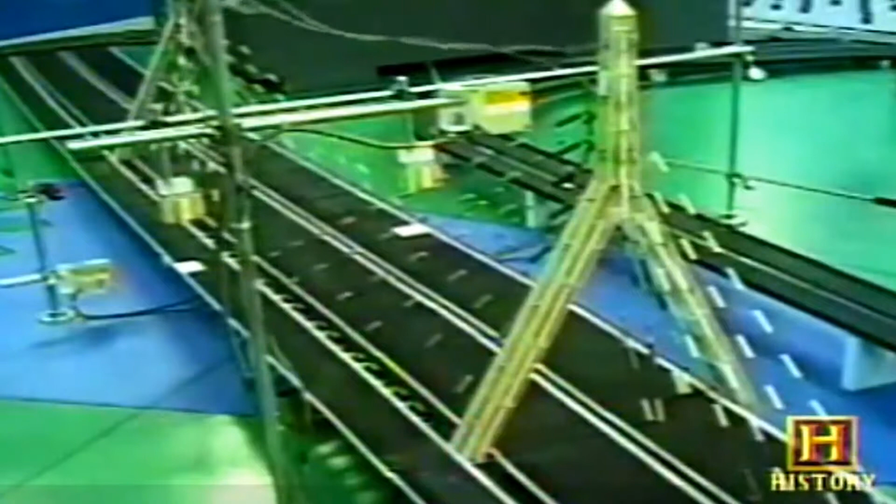Scientists use wind tunnel testing to help them better understand nature's destructive forces. Each design has its unique situations as far as forces are concerned, whether it's the force of a hurricane wind or whether it's an earthquake, which is a different force. It's a horizontal and vertical movement all at the same time.

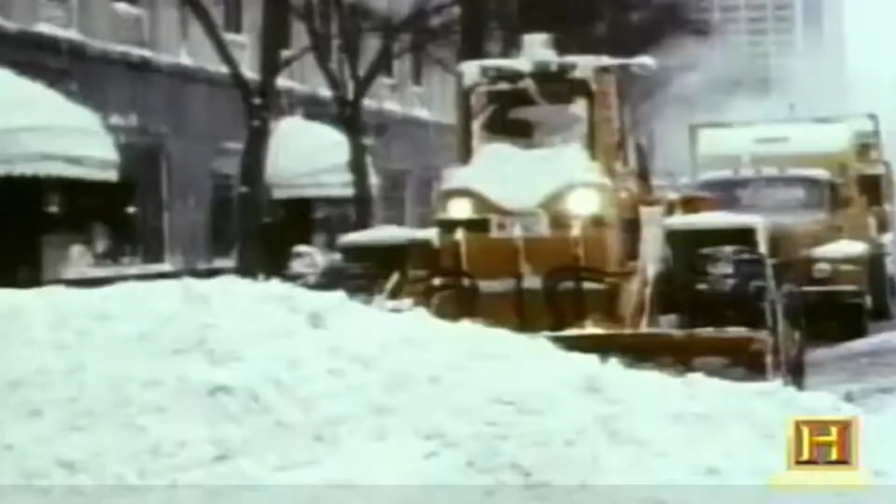Winter weather is another environmental enemy of concrete. The continual freeze-thaw cycles of the seasons can shatter the microstructure of the paste that holds concrete together. Damage to the Baha'i Temple in Wilmette, Illinois, is a good example of the effects of weathering. The microscopic bonds between the cement and the sand and the aggregate stones get broken over time by this tiny bit of freezing and thawing action, so that you begin to have kind of a melting, a weathering away of the surface.

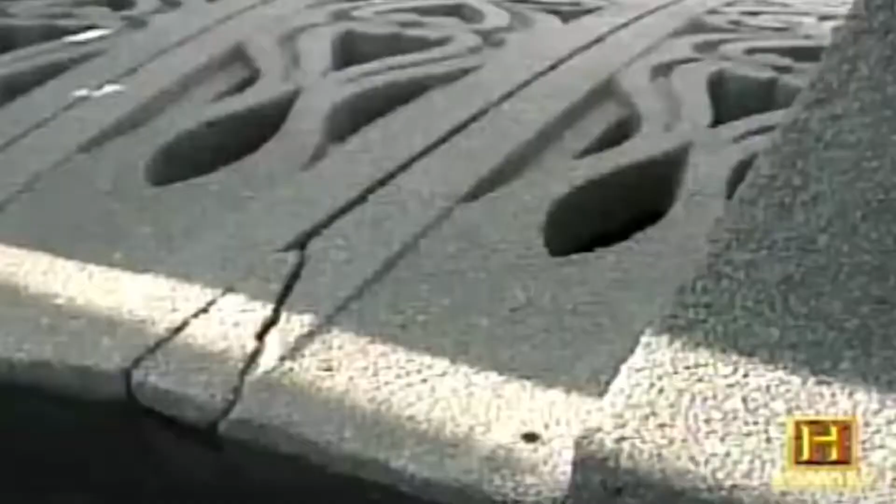The freezing and thawing effect on concrete will only attack the surface. It works from the outer areas in, because it takes moisture going into the surface of the concrete to generate that freezing effect. The pressure generated as water expands into ice pushes a wave of water deeper into the concrete. It has taken a major renovation project at the Baha'i Temple to repair the concrete and restore it to its original condition.

Concrete is such a new material that we have not had the history of how it breaks down in the weather. How does it break down from loads that continually come across it, such as when a train crosses a bridge? That's what we're learning. That's where we're improving. Next, engineers are also learning how to use concrete to stop a plane. And they're thinking about a huge untapped source of raw materials.

A commercial jetliner touches down at a busy airport. But there's a problem, and the plane can't stop by the end of the runway. This is one solution. It's called a soft ground arrestor system, and it uses cellular concrete to stop the plane.

So if an airplane is going down a hardened concrete pavement and it gets to the end, and the brakes didn't work, it goes into the cellular concrete, which is essentially a structural foam, and gradually sinks into this, and it's essentially an artificial brake. The cellular concrete is somewhat like styrofoam, created with millions of microscopic air bubbles that are intentionally added during a precasting process. It's designed to be firm, yet flexible, and collapse on impact, crushing predictably.

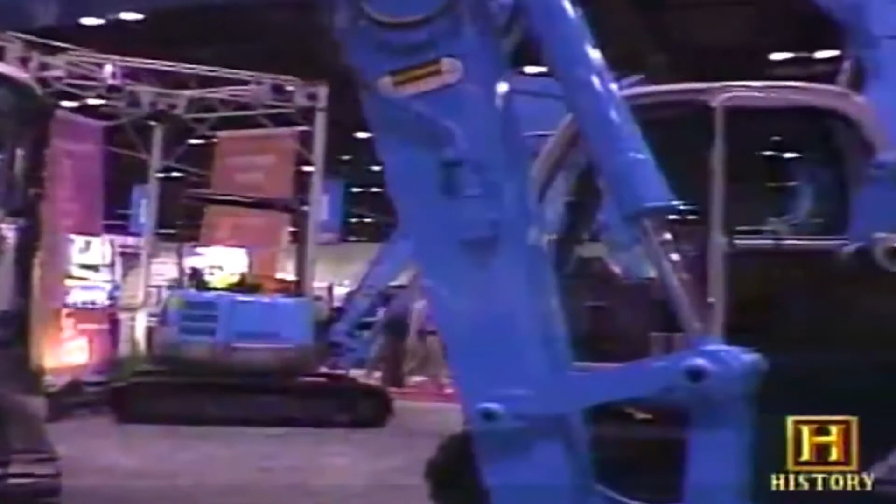Every year, the concrete industry holds a massive convention to show off what's new in the business. It's called the World of Concrete. The World of Concrete is a blast. The World of Concrete is so full of people with new ideas, fresh ideas. They're working together. They're coming up with new mix designs. They're making new things possible we've never seen before. It's a giant concrete candy store where the latest tools of the trade are on display.

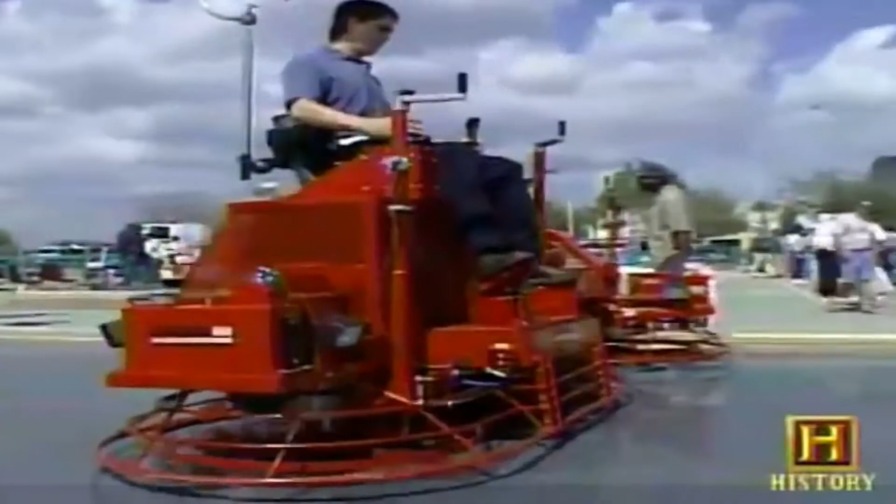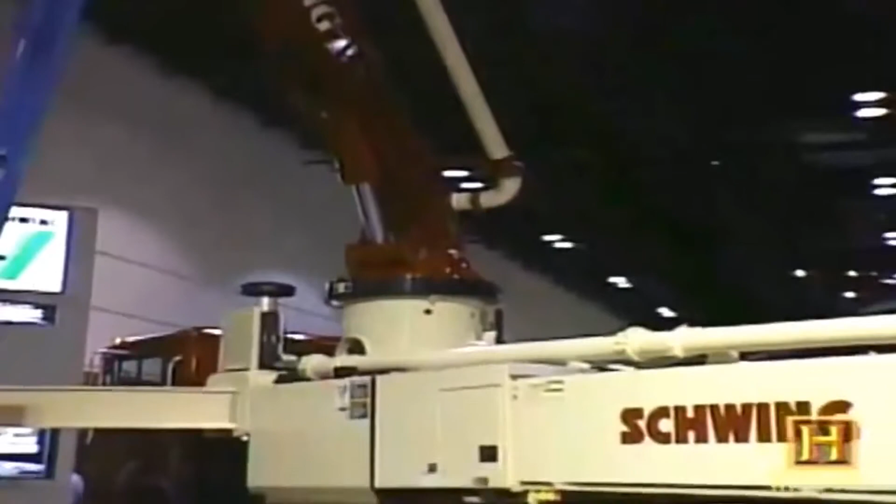At center stage, a new generation of mixing trucks that help supply a steady stream of concrete at the construction site. These state-of-the-art mixers use heavy-duty pumping systems to push the concrete where it's needed. You have to have a mixture that flows through the pipes from the pump at the base of the structure. And you want to make sure that the concrete doesn't set before it gets all the way up to the top.

There's much that's hot and new and exciting in concrete today. The things that strike my fancy the most with concrete is the creative use of color and finish. Modern concrete home builders are taking advantage of techniques and ideas that were pioneered by legendary American architect Frank Lloyd Wright. He just used concrete in ways that other people hadn't used it before.

Wright was once referred to as a rebel in concrete. He believed that a building should develop out of and exist with its natural surroundings. Wright personally showcased that philosophy in the late 30s with his legendary design and construction of the so-called Falling Water concrete house in Pennsylvania. Frank Lloyd Wright used concrete as art. Really, he liked to expose concrete. He used molds to develop patterns on his structures.

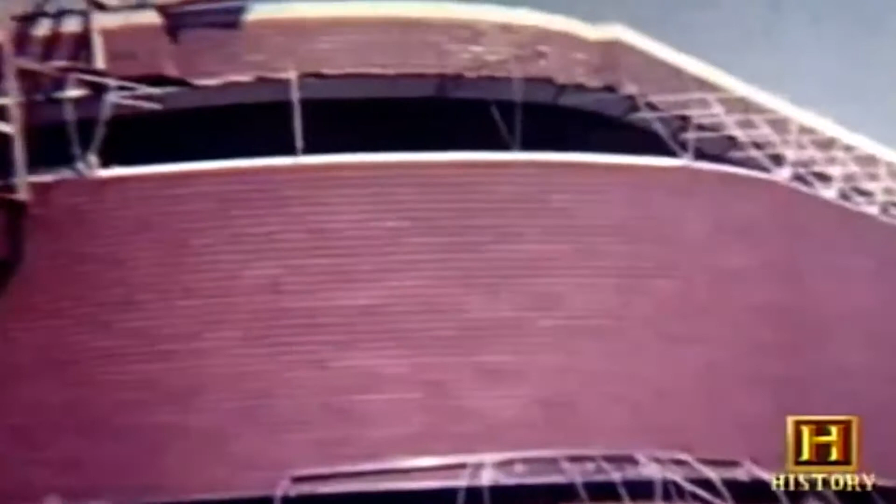But the futuristic Johnson Wax building might be Wright's greatest work. Built in Racine, Wisconsin in 1936, it used the weight-bearing capabilities of concrete to create a futuristic working environment in a corporate headquarters. Wright's early use of concrete blocks has led the way for dramatic new uses of concrete in modern home building. These insulating concrete forms are gaining widespread acceptance.

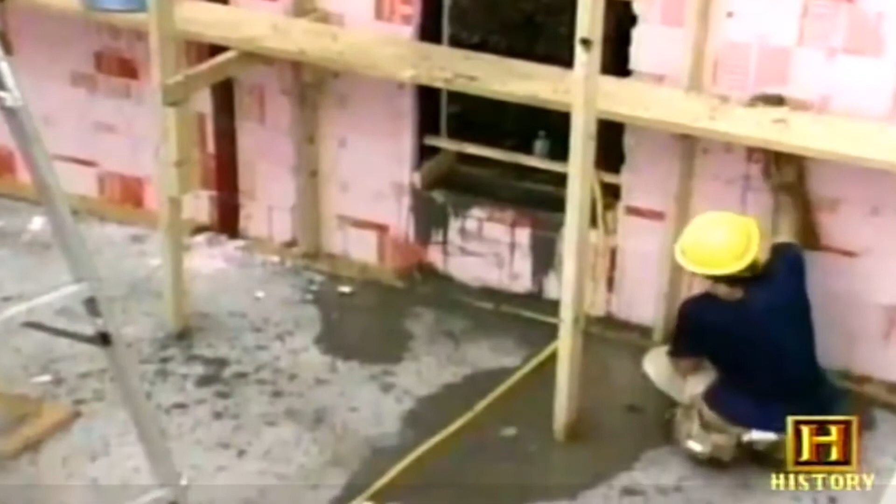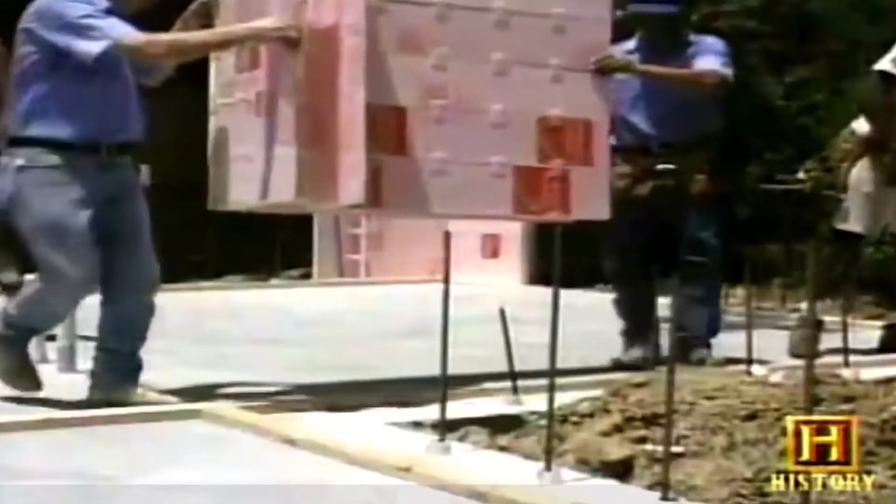I would say the use of concrete for home building is probably the single most revolutionary use of concrete. Polystyrene forms that are stacked in place with polystyrene on both sides. Once you form the shape of your structure or home, then you place concrete inside. So once the concrete hardens, you have a super strong home that's also very energy efficient because of the insulation. It's also very quiet because of the concrete.

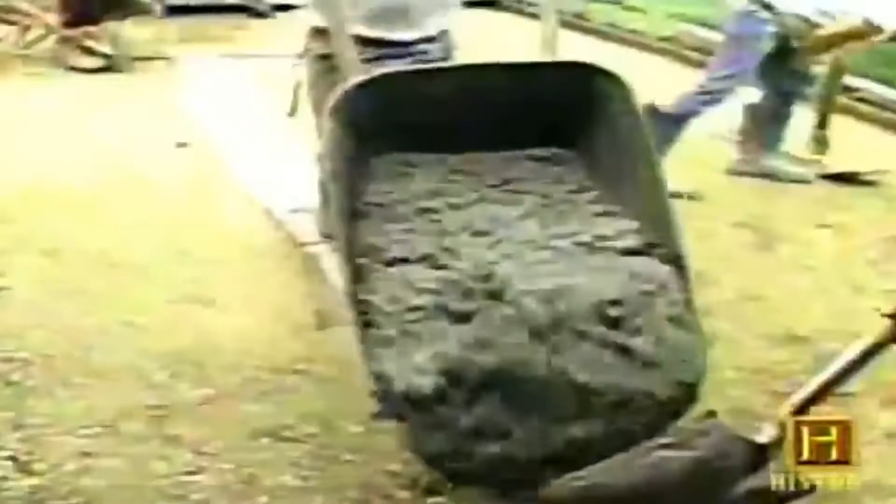We can add any kind of external finishing from siding, brick, stucco, so they look just like any other house on the block. They don't look like a big gray concrete square. They can look like any home you see in a typical American neighborhood. Concrete's lasting legacy will be its widespread use. The same substance that makes it possible to build something as simple and benign as a driveway also makes it possible to construct a military missile silo.

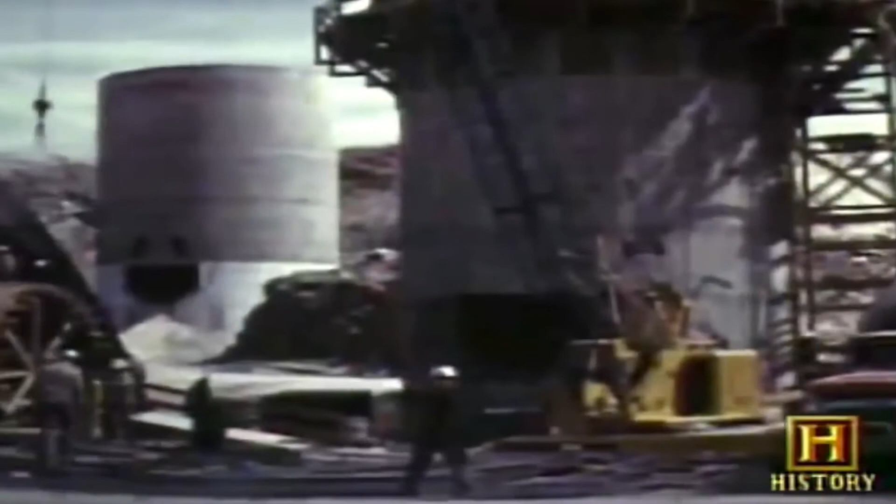Concrete is an essential part of civic icons around the world, from the Gateway Arch in St. Louis to the Space Needle in Seattle and the Opera House in Sydney, Australia. When concrete was fashioned into the Berlin Wall, it separated an entire city. But when it was used in the English Channel Tunnel, it brought two nations together. And when it was poured into the gigantic foundation of the Petronas Towers in Kuala Lumpur, it anchored the tallest building in the world.

Every day, a new concrete building makes a new statement somewhere. And for the future, the sky's the limit. You could make concrete on the moon. There's no reason you couldn't make Portland cement on the moon, because the raw materials already exist there. People have looked at the moon rocks and realized that what they call lunar concrete is entirely possible. The composition of a lunar rock is not that different from that of Portland cement. All you have to do is figure out how to make water.

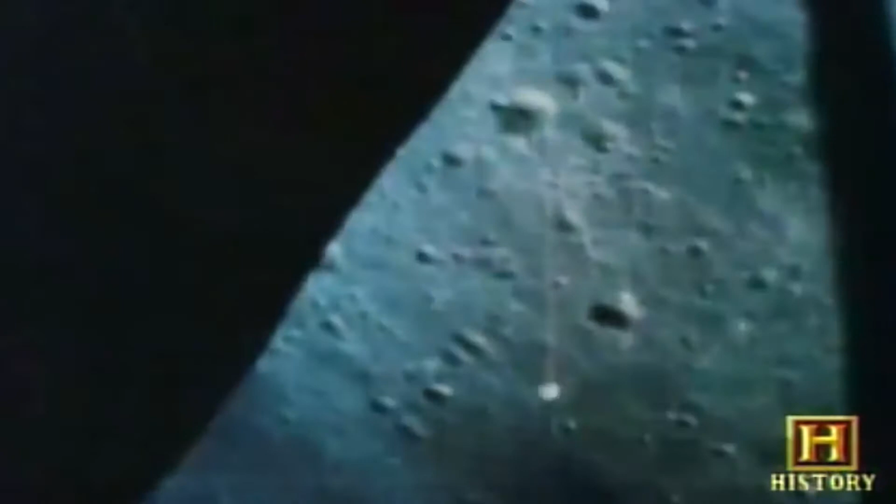Perhaps with space stations, ultimately, we may be able to take materials into space, mix it, and make concrete as we know it here on Earth, and use it for construction purposes. Yeah, I think sky's the limit. There's no place that you can't go and see concrete, and that's going to be true for the next 100, 500 years.